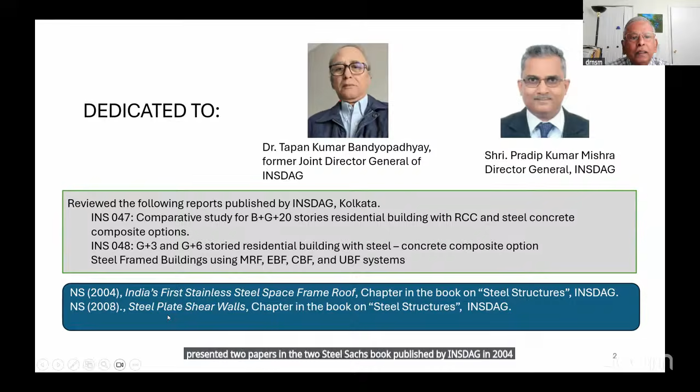Out of so much development, I have selected some 14 topics. I don't know whether I will be able to complete all these topics within the given time, but anyhow, I will try to present them. And some of the things I will go fast so that I could finish it within 1.5 hours.

So the topics are 3D printing and wire arc additive manufacturing, hollow steel sections and jumbo hollow steel sections, high strength steel, stainless steel members and bolts, automated welding, curved steel, diagrid systems to resist lateral forces, earthquake resistant pre-qualified moment connections, steel plate shear walls, composite steel core walls, painting systems to reduce corrosion, repair of steel sections using WAAM and cold spray, sustainability and reuse of steel sections, and finally AI and related topics.

So all of you know that steel is primarily produced using one of the two methods, that is blast furnace, basic oxygen furnace, and electric arc furnace. In India, 43% is by BF and BOF and 57% by EAF. EAF is different from the BF or BOF route, as it does not produce iron and solely produces steel. Steel production in EAF involves melting recycled steel scrap using high-powered electric arcs and is more sustainable.

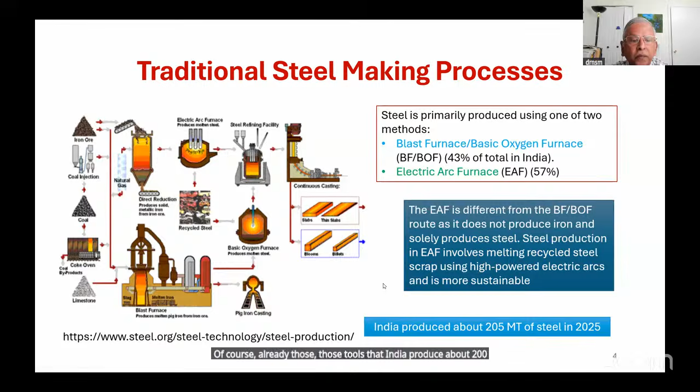Of course, already Ghosh told that India produced about 205 million tons of steel in 2025. So we will first take the 3D printing. When printing structural steel members or connectors, powder-based methods like laser powder bed fusion, used in low volume, high value parts like machine parts, are rarely used due to chamber size constraints and high cost. Instead, the industry uses wire arc additive manufacturing, WAAM, a form of directed energy deposition, laser wire and electron beam DED, and cold spray additive manufacturing. We will talk about cold spray additive manufacturing at the end when we are talking about the repair.

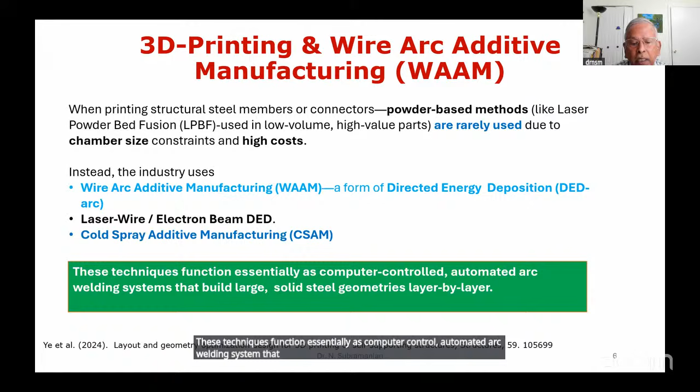These techniques function essentially as computer-controlled automated arc welding systems that build large solid steel geometries layer by layer. These are the equipment necessary for the 3D printing.

We also need a power source or welding generator, a high precision arc welding power source using standard processes like cold metal transfer, etc. A welding torch and wire feeder automatically feeds solid or flux-cored steel wire, typically 0.8 mm to 1.6 mm diameter, directly to the heat source at controlled rates.

Then we also need a shield gas system. It delivers inert or active gas mixtures such as argon around the weld pool to protect the hot structural steel from oxidation or nitriding. And there is a build table.

Additionally, we need CAM and slicing software that calculates the 3D tool path to control heat input and prevent thermal distortion. Finally, thermal monitoring and pyrometers are also necessary. Infrared cameras or pyrometers measure interpass temperature in real time to prevent thermal buildup and grain coarsening in the steel.

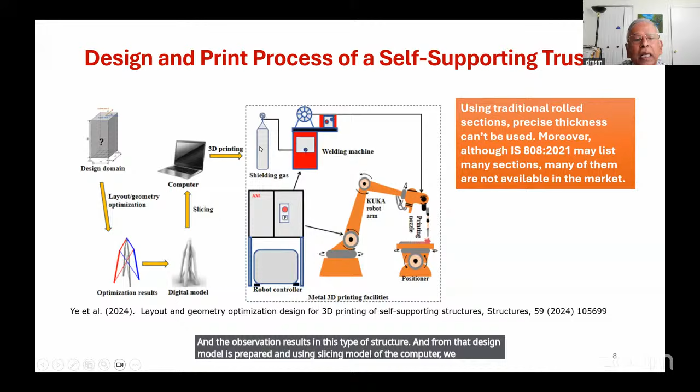So this is an example of the system. You have a design domain where you design, and then it does the layout, geometry, and optimization. The optimization results in this type of structure, and from that a design model is prepared. Using the slicing model on the computer, we use the 3D printing as already explained. These are the different parts of the 3D printing system.

You know that using traditional rolled sections, precise thickness cannot be used. Even when optimization is used, it is not very common in steel sections, because optimizing may give a thickness of 2.3 mm or 4.5 mm, which you cannot use since the rolled sections available in India are listed in IS 808, and many of them may not be available in the market. But when using 3D printing, we can optimize and get such thicknesses, so this will be useful to produce structures with optimized geometry and thickness.

I just wanted to show you the world's first 10.5 meter long 3D printed pedestrian bridge at Amsterdam. This bridge was developed by researchers at Imperial College London in collaboration with Dutch company MX3D and Arup. The construction took 4 years using about 4,500 kg of stainless steel.

Of course, it took 4 years because this was the world's first 3D printed pedestrian bridge. Research is being conducted every day, and the speed will increase.

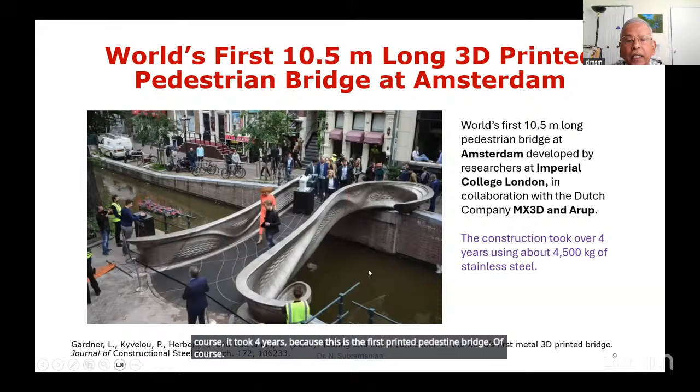I just wanted to show the advantages of 3D printing. The advantages are high deposition rates. WAAM deposits metal at 1 to 10 kg per hour compared to 0.1 kg per hour for laser powder bed systems, making it economically viable for large structural elements.

On material efficiency, ordinary machines waste up to 80% of steel stock, but 3D printing creates near net shape preforms using only the steel necessary for structural integrity.

Topology optimization, as I already explained, uses software to optimize, and also allows elimination of connection plates. Complex multiplanar connections, for example tubular space frame nodes, can be printed as a single monolithic unit, eliminating failure-prone field welds and heavy gusset plates.

Scalability - the build volume is limited only by the reach of the robotic arm or CNC gantry, allowing components spanning several meters. On-demand and remote fabrication - robotic cells can be deployed inside fabrication shops or near construction sites to print custom structural repair parts, which I will explain at the end, or specialized connectors on demand.

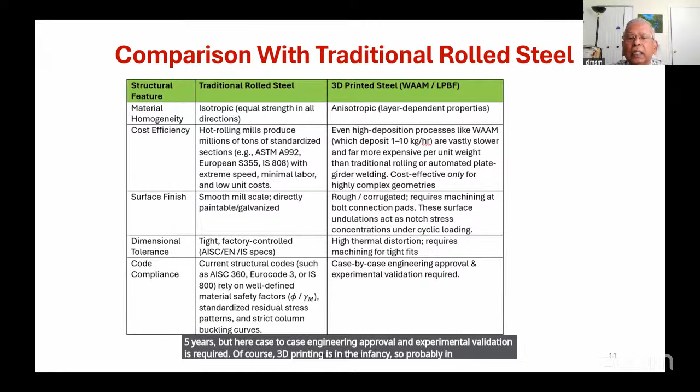For code compliance, using traditional rolled steel means we have traditional structural codes which are revised every 5 years. But here, case-to-case engineering approval and experimental validation is required. Of course, 3D printing is in its infancy, so probably in a few years it will overcome many of these problems.

Next we will go to hollow steel sections and jumbo hollow steel sections. So why hollow steel sections? As per the 16th edition of the AISC Steel Construction Manual, 1,160 different hollow steel sections are available in America. The square HSS range from 12.5 by 12.5 millimeters to 550 by 550 millimeters - that's a very big range. Similar ranges are available in rectangular and also circular HSS.

In the USA, Atlas Tube makes these tubes with a thickness of up to 25 mm. In India, Tata Structura manufacture them as per IS 4923 and IS 1161. They offer simpler and more economical beam and column connections than wide flange sections.

While welding is most common, bolted blind innovative connections including Shuriken by Atlas Tube and Lindapter's Hollo-Bolt and blind bolt have been developed. I will discuss the Shuriken and Hollo-Bolt in the subsequent slides.

They have higher strength to weight ratio in compression compared to wide flange sections. In column applications, they can have long unbraced length, using less steel than wide flange sections to carry the same load, offering cost savings and reduced embodied carbon. These sections put material at the perimeter, hence are very efficient at resisting biaxial bending.

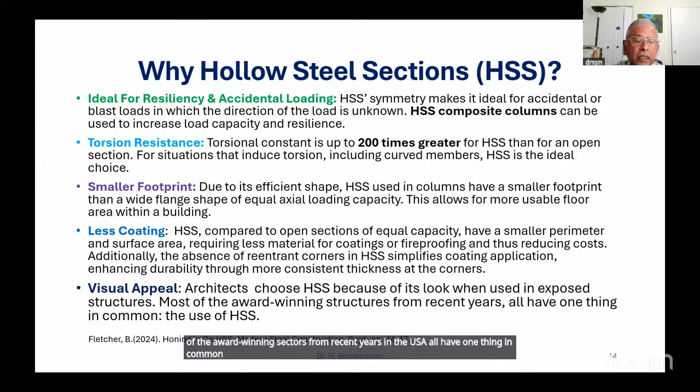They also have visual appeal - architects choose hollow steel sections because of their look when used in exposed structures. Most award-winning structures from recent years in the USA have one thing in common: they use hollow steel sections. Let me show one example of an award-winning hollow steel section building.

So I was telling about the Shuriken connections by Atlas Tube. It was developed by Ted Goldstein, an inventor originally from New York who moved to Japan in 2018. At that time he developed Shuriken.

Unlike traditional connections that require dual side access - when bolting you need access on both sides - Shuriken simplifies installation, making it ideal for tight, restricted or inaccessible areas, while also ensuring faster assembly, lower cost and easier inspection in the field. It is a patented internal connection solution for hollow steel that functions as a one-time use wrench, enabling secure bolting from one side only.

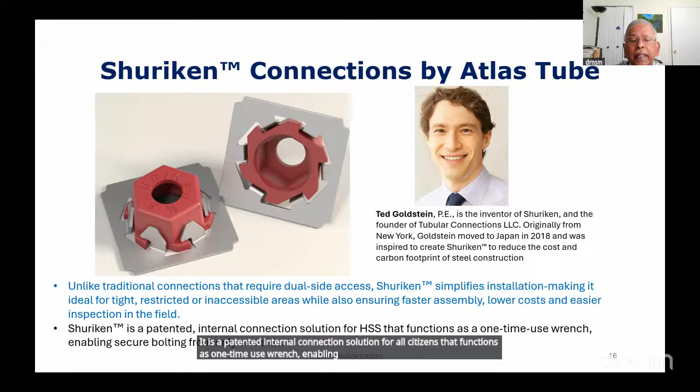So let me show this hollow steel tube with openings. Inside, this device is tack welded to the metal plate in the fabrication shop. On site, the second member is simply bolted to the fixed plate using this connection, with no need for internal access - it's enough to tighten from the outside. This results in faster assembly, fewer alignment issues, and reduced labor and welding costs.

So I have already told you some of the advantages: one-sided bolting, cleaner aesthetics, faster construction, cost-effective use, and easy inspections.

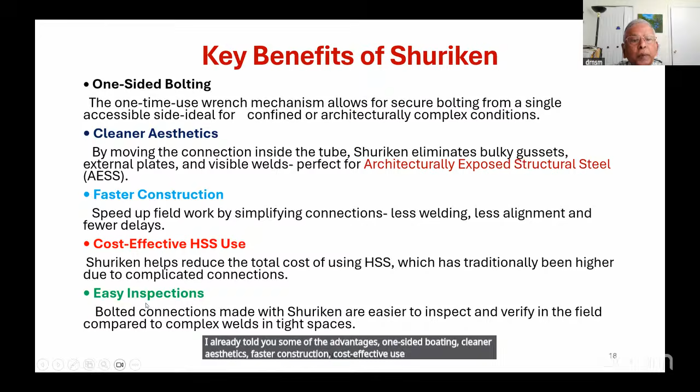Another type of bolting already available in UK and other places—I don't know about India—has a bolt with a sleeve. While tightening, the sleeve expands and it is installed. It is quickly carried out by inserting into pre-drilled holes and tightening with a torque wrench. It's also suitable for blind connections where access is available from one side only, and is recognized in the AISC Steel Construction Manual for use in all seismic design categories.

Let us go to jumbo hollow sections. Jumbo sections exceed standard sizes, allowing for greater structural applications and capabilities. They typically meet ASTM A500 and ASTM A1085 standards, ensuring quality and performance. I have given some sizes.

Square hollow sections greater than 350 mm and up to 550 mm. Rectangular sections from 600 mm by 300 mm up to 850 by 250 mm. Round hollow sections with outer diameter greater than 400 mm up to 700 mm, and wall thickness from 10 mm up to 25 mm. These are commonly used in construction, manufacture, and fabrication of large span structures, bridges, tall buildings, etc., due to their strength and aesthetic appeal. Their design allows for efficient load distribution, making them suitable for large structures. I have shown some of them here.

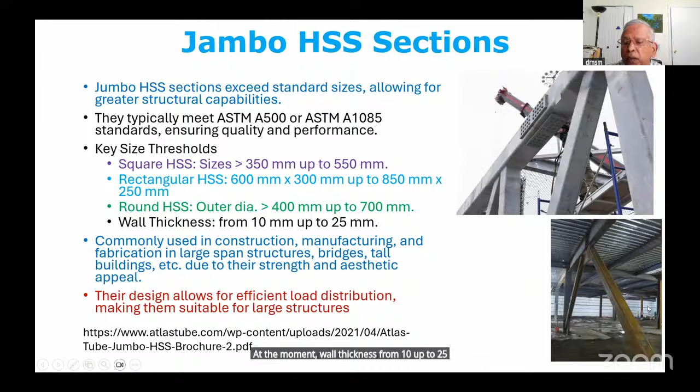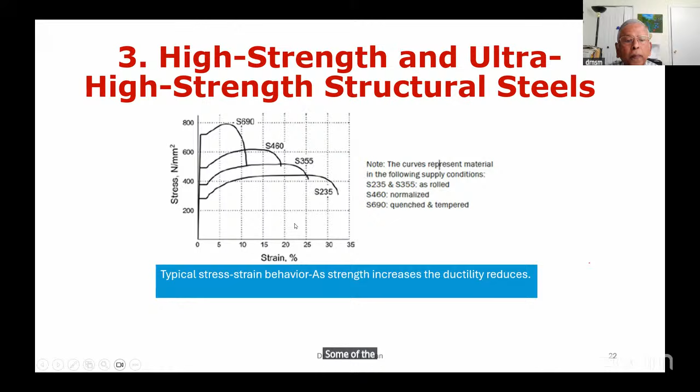Next, we will move on to the third section: high strength and ultra high strength structural steels. Typical stress-strain behavior shows that as strength increases, ductility reduces. High strength structural steel generally has yield strengths of 460 to 700 MPa, and ultra high strength structural steels have yield strengths of 700 MPa and above.

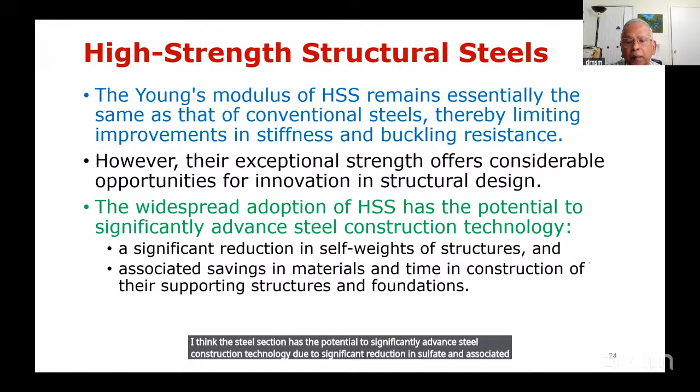High strength steel's Young's modulus is essentially the same as conventional steel, thereby limiting improvements in stiffness and buckling resistance. However, their exceptional strength offers considerable opportunities for innovation in structural design. The widespread adoption of high strength steel has the potential to significantly advance steel construction technology due to significant reduction in self-weight and associated savings in materials and time in construction of support structures and foundations.

IS 2062 is now published in Part 1 and Part 2. Part 1 was published in 2025 and Part 2 in 2026. It gives—I have only listed the high strength steels here—in addition to the low ordinary strength steels, it now also lists up to 650 MPa grades. I have shown the yield stress, ultimate tensile strength, and percentage elongation. As you see, the percentage elongation reduces as the strength increases.

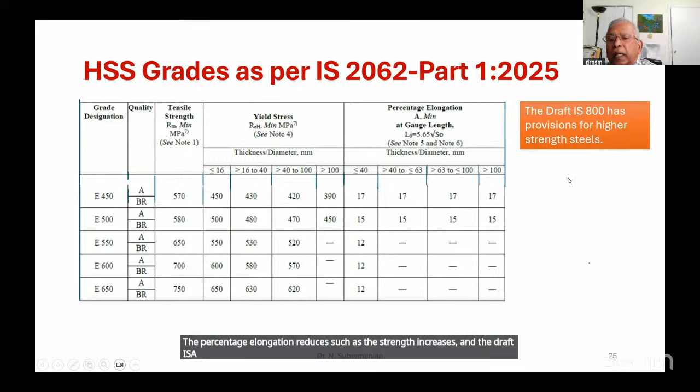The draft IS 800, which I don't know will be released soon—it is under printing, I think—has provisions for high strength steels also.

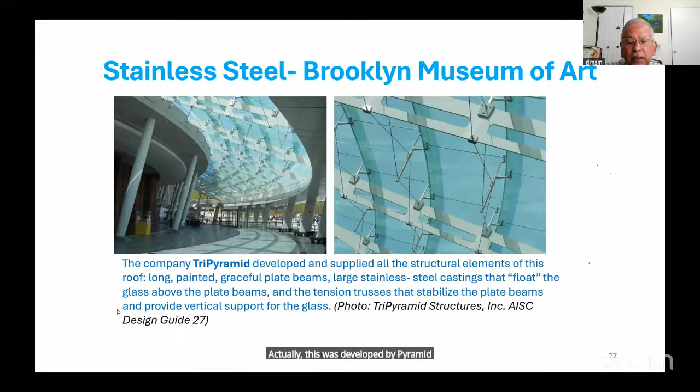Actually, this was developed by TriPyramid Structures, and that is given in design guide 27.

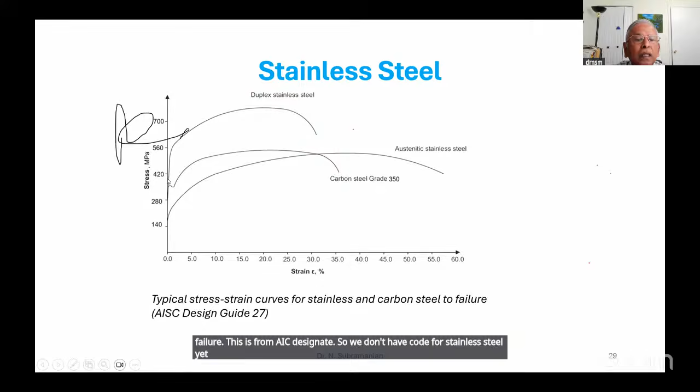This is the typical stress-strain curve for stainless steel and carbon steel for failure, from the AISC design guide. So we don't have a code for stainless steel yet. I don't know how this came.

These are commonly used standard austenitic stainless steels: S304 and S304L, containing 18 to 20% chromium and 8 to 11% nickel. Also S316 and S316L contain about 16 to 18% chromium, 10 to 14% nickel, and 2 to 3% molybdenum, which improves corrosion resistance.

You see that in these there is an L. This L indicates the low carbon version, with a reduced risk of sensitization to intergranular corrosion in the heat-affected zones of welds of these stainless steels.

The duplex alloy S32205 is the most commonly used. It provides a significant increase in corrosion resistance. Other duplex alloys are also present.

I am comparing three different grades of stainless steel, in the groups austenitic, duplex, and ferritic. These are the grades as per Eurocode, and these are the grades as per American codes and ASTM. As shown already, the chromium content differs, and nickel content also differs, and in some of them molybdenum is also present. The ductility in some of them is very high, even compared to steel.

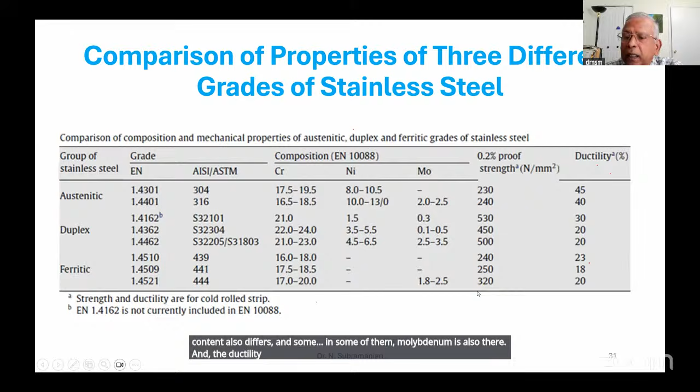And of course, if you are using stainless steel, you also need stainless steel bolts. So I have listed some of the bolts as per ASTM, and I have shown these bolts also here.

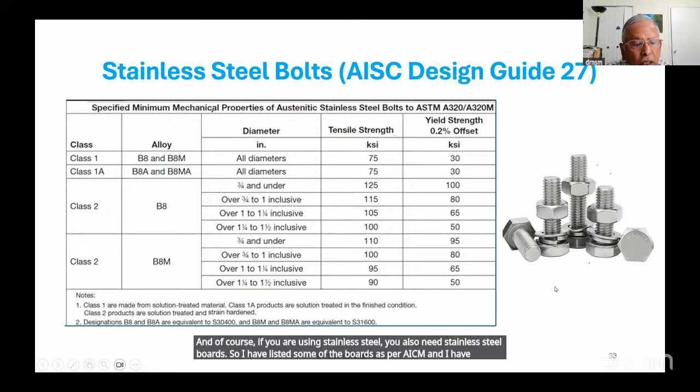So next we will move on to automated welding.

Automated welding is a key technology in modern steel construction, improving productivity, weld quality, safety, and consistency while reducing labor costs and fabrication time. It is widely used in the fabrication of bridges, buildings, and other structures. There are three types of automated welding: mechanized welding, robotic welding, and adaptive welding.

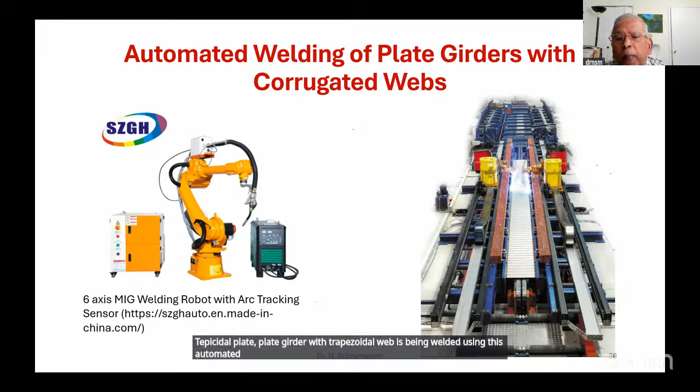I have shown one example of a welding machine. This also has a 6-axis MIG welding robot with arc tracking sensor, and you see that this trapezoidal plate girder with trapezoidal web is being welded using this automated welding system. It is very difficult to manually weld such corrugated or trapezoidal or any other shape of webs using manual welding, so only with automated welding is it possible.

Compared to a flat steel web, the corrugated steel web has higher out-of-plane stiffness and shear buckling resistance. It also has reduced material, 30 to 60% lighter, and reduced labor cost, and higher fatigue strength by 50% because of the stiffened webs. I forgot to mention, if there is a slide and a reference, that will give more details about the things I am discussing here.

Future trends in automated welding are fully autonomous robotic welding cells, AI-driven adaptive welding systems, integration with building information modeling, multi-robot coordinated welding, hybrid laser arc welding systems, automated non-destructive evaluation integrated with welding, and sustainable welding processes with reduced energy consumption and emission.

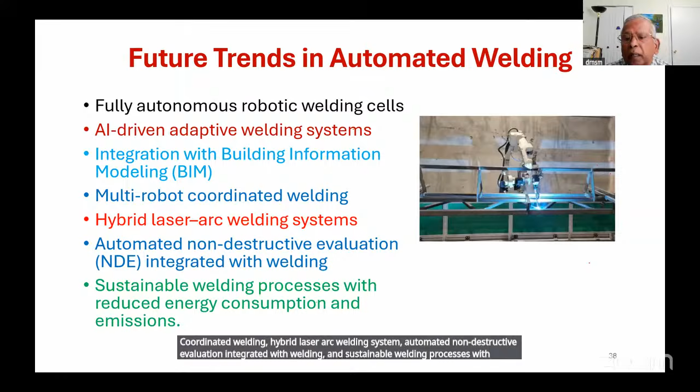Next, we will move on to curved steel.

These are some examples of curved members encountered in practice, like arches, bridges, buildings with curved roofs, and stainless staircases with curved members.

Bender rollers receive the steel from the fabricator, or sometimes furnish it themselves, curve it, and then ship the curved steel back to the fabricator. So a bender roller is typically a specialty subcontractor of the steel fabricator, used for arches, bridges, domes, and curved roofs.

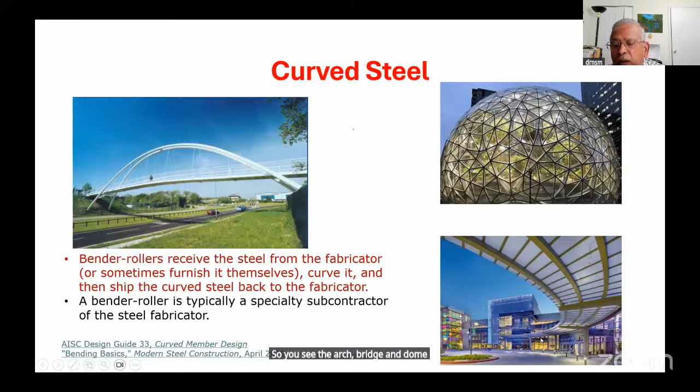This curving of steel members is a specialized fabrication process used to produce arches, curved girders, etc. The choice of method depends on the required radius of curvature, member size, steel grade, cross-sectional shape, and accuracy requirements. We curve these members in 8 different ways, and I will cover some of them in the next slides.

The first method is cold rolling, the most common and economical method. The member passes repeatedly through 3 or 4 powered rollers, and the position of the central roll is gradually adjusted until the desired curvature is attained. The advantages are that no heat is required, it gives good dimensional accuracy, has minimal effect on material properties, and is economical for long members.

Another method is plate rolling. Steel plates are rolled into cylindrical or conical shapes before fabrication. A 3-roll or 4-roll plate bending machine gradually bends the plate into the required radius.

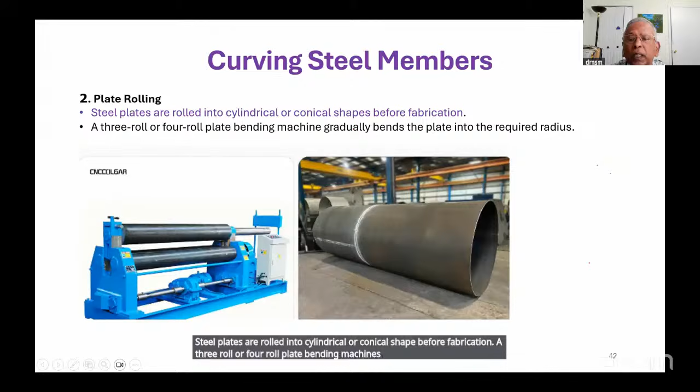The third type is heat bending, used for thick or heavy members that require localized heating. A narrow region is heated to approximately 600 to 900 degrees Centigrade, after which the member is bent using hydraulic jacks or presses. As the heated zone cools, the steel contracts, producing the required curvature. It is suitable for large sections and can produce relatively tight radii.

The problems with heat bending are that it requires skilled operators and may introduce residual stresses. Mechanical properties can be affected if temperature control is poor.

We will also discuss ways of curving hollow steel sections. Circular, square, or rectangular hollow steel sections can generally be curved using rotary draw bending, roll bending, and induction bending. To prevent local buckling or distortion, tubes may be filled with dry sand, low melting point alloy, or internal mandrels.

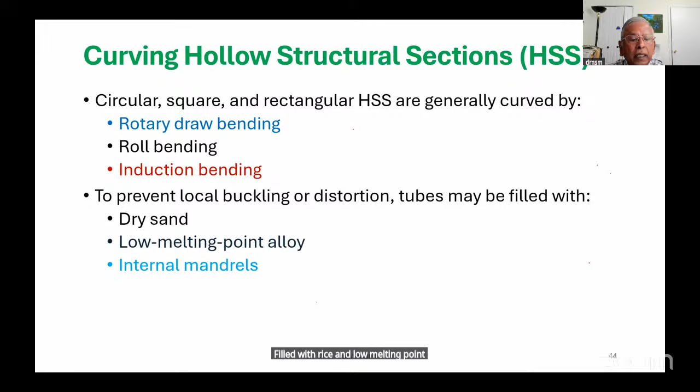The fourth type of bending is press bending. Hydraulic presses apply force at discrete points to bend the member. It is suitable for thick plates, box girders, and heavy structural members.

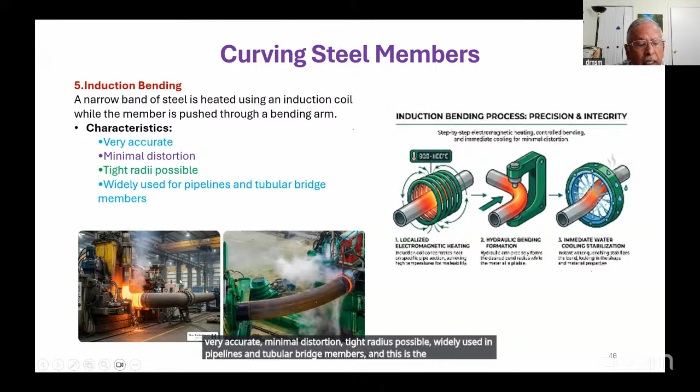Another type is induction bending. A narrow band of steel is heated using an induction coil while the member is pushed through a bending arm. It is very accurate, has minimal distortion, allows tight radii, and is widely used in pipelines and tubular bridge members. This diagram shows the concept and how it is being bent.

Other methods of curving members include stretch forming, used for cold formed members, and flame line heating. Sometimes the member is not actually bent at all; instead, it is fabricated from many straight segments or from curved plates that are welded together.

When bending like this, and especially when using heat, it produces residual stresses and geometric imperfections. This may influence buckling resistance, fatigue performance, fracture behavior, and dimensional accuracy.

For high-strength steel, tighter control is required because these steels generally have lower ductility and are more sensitive to cold working than conventional grades. Design specifications may require minimum bending radii and limits on induced strains.

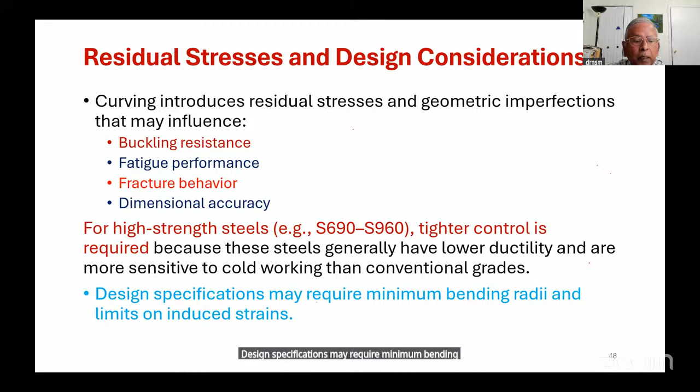I have listed some of the design standards and guidance: AISC Design Guide 33, CIDECT Design Guides—three guides are there—EN 1090-2, Eurocode 3, and American Welding Society D1.1.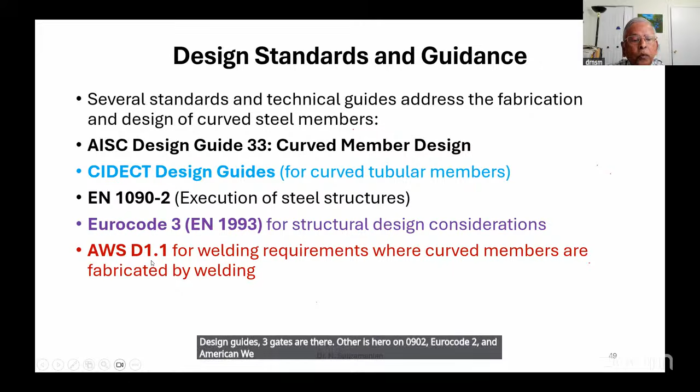We will move on to diagrid systems. All of you know that Fazlur Rahman Khan was the inventor of the tall tubular system. During the 1960s, he found that beyond 10 stories, steel weight was increasing exponentially. Hence he developed the tubular system for high-rise buildings and other variations like tube-in-tube, braced tube, bundled tube, etc. I am going to discuss only the latest development in this tall building system.

This is the diagrid system. In this system, they use perimeter diagonals for structural effectiveness, giving a lattice-like aesthetic. I have shown a diagram and actual structures that use this diagrid system.

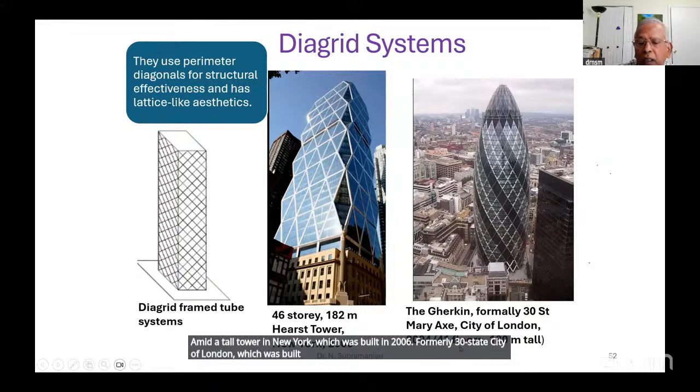One example is a 46-story, 182-meter tall tower in New York, built in 2006. Another is 30 St Mary Axe, formerly known by a different name, in the City of London, built in 2004, which has 41 floors and is 180 meters tall.

As you have seen, almost all the conventional vertical columns are eliminated. The diagonal members carry gravity loads as well as lateral forces due to their triangulated configuration. Compared with conventional framed tubular structures without diagonals, they are much more effective in minimizing shear deformation. It is because they carry shear by axial action of the diagonal members, while conventional tubular structures carry shear by the bending of the vertical columns and horizontal spandrels. You know that tension and compression members are better than bending members.

And I have shown the tubular node for the Gherkin London structure, and you can refer to these references for more details. They provide both bending and shear rigidity. Unlike outrigger structures, they do not need high shear rigidity cores because the shear can be carried by the diagrids located on the perimeter. Super tall buildings with a diagrid system can be further strengthened and stiffened by engaging the core, generating a system similar to tube in tube. The optimum angle for the diagonals was found to be 63 degrees up to 40 to 50 stories and 69 degrees for 60 to 100 stories.

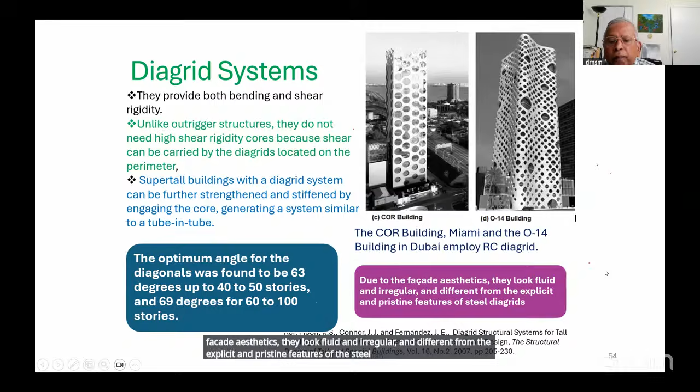I have shown some more examples. The outside facades are different in these, but these are also diagrid systems. Due to the facade aesthetics, they look fluid and irregular and different from the explicit and pristine features of the steel diagrids. Another exotic application of this diagrid structure is the CCTV tower in China, which was constructed in 2008 during the Olympic Games. It is an example of an innovative diagrid system that improves structural performance and produces exotic form. But I don't like this structure because of the two cantilevers which are connecting these two towers.

Another exotic diagrid structure, I found it to be very different. This was designed by the late architect Zaha Hadid, and she is very popular for producing very different looking structures, especially curved structures. This is 160 meters tall with 40 stories. This is the Morpheus Hotel at the City of Dreams in Macau, China. So you see in this image, this is the dynamic portion of the diagrid. So this portion is expanded here and shown.

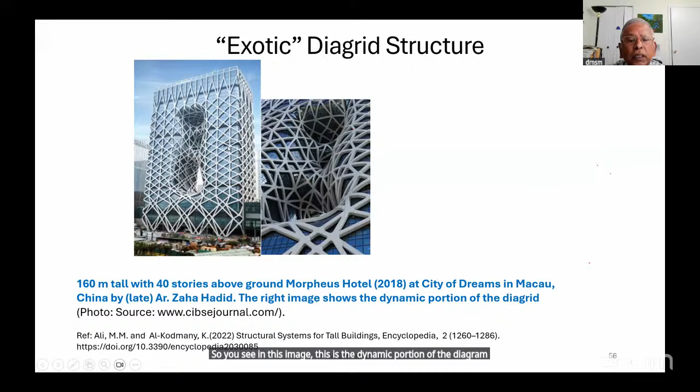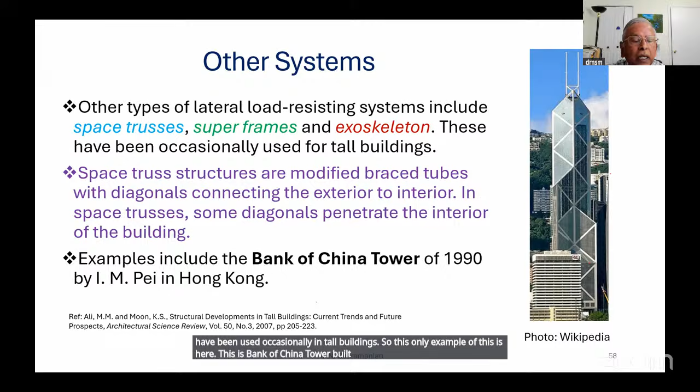And in addition to the ordinary diagrid, we also have the hexagrid system. It's a new system that consists of multiple hexagonal grids. You see, they are hexagonal at the exterior perimeter surfaces of the building. There are also other systems which can be used for lateral load resistance. They include space trusses, super frames, and exoskeleton. They have been used occasionally in tall buildings. So one example of this is here. This is the Bank of China tower built in 1990, and the architect is I. M. Pei. This building is in Hong Kong.

So let us go to the eighth topic. Pre-qualified moment connections. Actually, pre-qualified moment connections were developed to provide reliable, ductile, and economically practical beam-to-column connections for steel moment-resisting frames, particularly in regions of high seismicity. Actually, why were they developed? In America and Japan, they found that their welded steel moment connections were very good. But during the 1994 Northridge earthquake in California and the 1995 Kobe earthquake in Japan, there were unexpected vulnerabilities in the welded steel moment connections.

So AISC 341 established a series of requirements to permit their use. That is pre-qualified use, starting with AISC 358-2010. Now the current one is 2022. Materials, design, detailing, fabrication, and inspection of seven connections for special and intermediate steel moment frames were referenced by AISC 341. These pre-qualified moment connections have been thoroughly tested and evaluated by an AISC sponsored standard body for their expected performance during big earthquakes. Of course, you have to note that in any earthquake resistant connection, adequate performance may include some amount of damage.

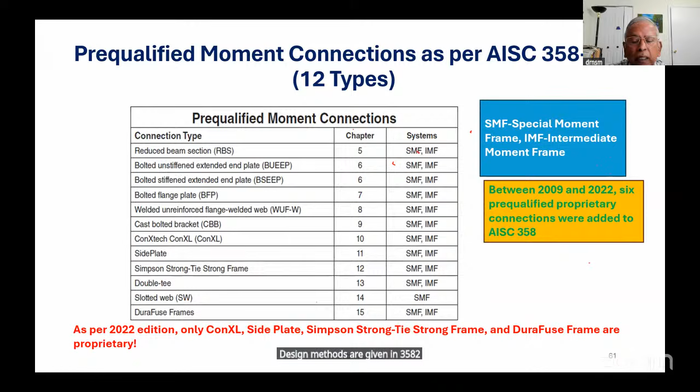ConXtech ConXL, SidePlate, Simpson Strong Frame, double T, slotted web, DuraFuse frames. Actually, some of them are patented. As per the 2022 edition, only ConXL, SidePlate, Simpson Strong Frame and DuraFuse frames are proprietary, and all others you can use. And the design methods are given in AISC 358-22. I will explain only a few of them in the next slides.

This is the simplest thing. The main aim in all the systems is that the connection should be safe during earthquakes, and hence the plastic hinge should form in the beams. So that is the main aim for all these sections. So in this system, portions of the beam flanges are trimmed, you see here, in a curvilinear fashion in the region adjacent to the beam-column connection.

Yielding and hinge formation are to occur within the reduced section of the beam, and the beam web is connected to the column flange using a CJP groove weld extending beyond the weld access holes. Of course, for the limitations of all these connections, see the AISC code 358.

So again, the same thing. Of course, I have shown only curved, but it is also possible to have straight, tapered, or even holes, because the main aim is to weaken the section where the plastic hinges will form. Of course, I have given the radius also, how to trim this section.

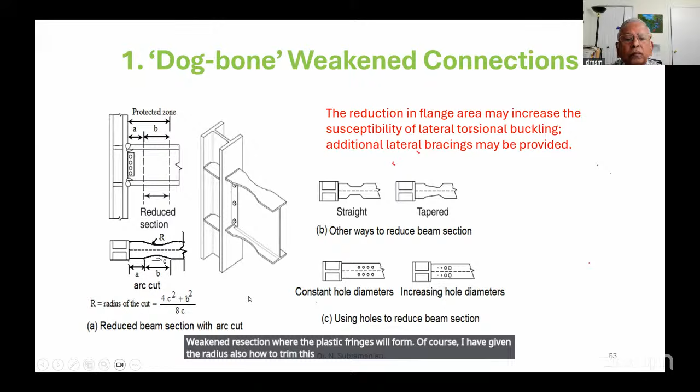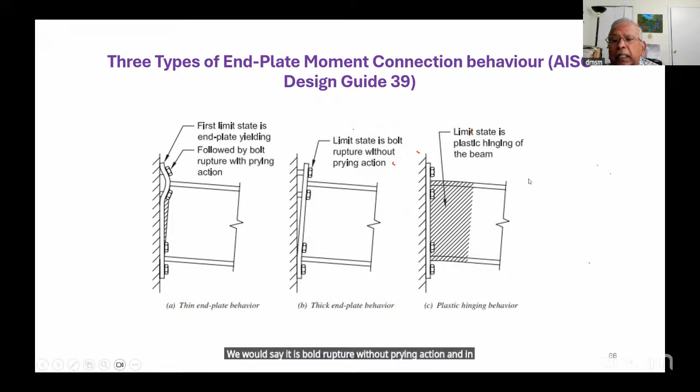And 3 types of end plate moment connection behavior. This is a thin end plate, which will result in prying action. The first limit state is end plate yielding, followed by bolt rupture with prying action. In thick end plates, the limit state is bolt rupture without prying action. And in plastic hinging behavior, the limit state is plastic hinging of the beam.

So this is once again an interesting system: the cast bolted bracket connection. This was previously a patented connection. You see here two different series, W series and B series. One is welded and the other is bolted. The cast high-strength steel bracket is fastened to each beam flange in the shop and bolted to the column flange in the field. The bracket is proportioned to develop the probable maximum moment of the connected beam.

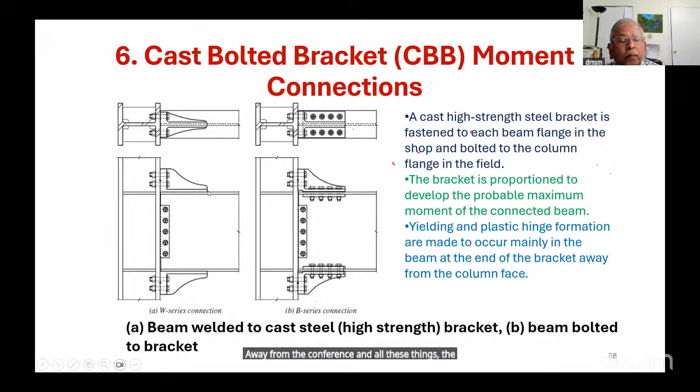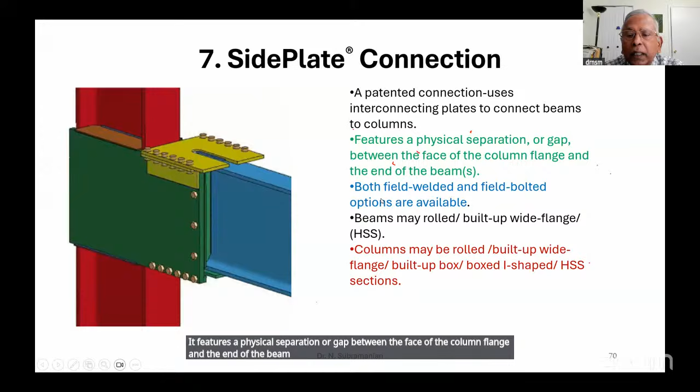This is a patented connection. It looks complicated, but once you give the forces and other details, they will give the plates and other things, and they will fabricate it. It uses an interconnected plate to connect beams to the column. It features a physical separation or gap between the face of the column flange and the end of the beams. Both field welded and field bolted options are available. Beams may be rolled, built-up wide flange, or hollow steel.

Please mute yourself. Others, please mute yourself.

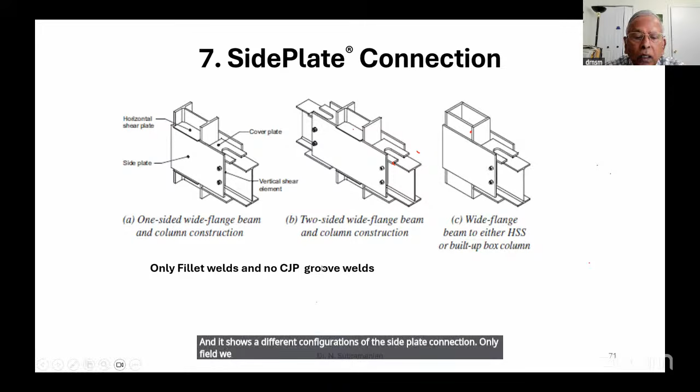And another patented connection is from ConXtech company: the ConXL and ConXR moment connections. This also looks slightly complicated. This patented system permits full-strength, fully restrained connection of wide flange beams to concrete-filled 400 mm square hollow sections or built-up box columns using a high-strength field-bolted collar assembly. These beams are shop welded to forged flanges.

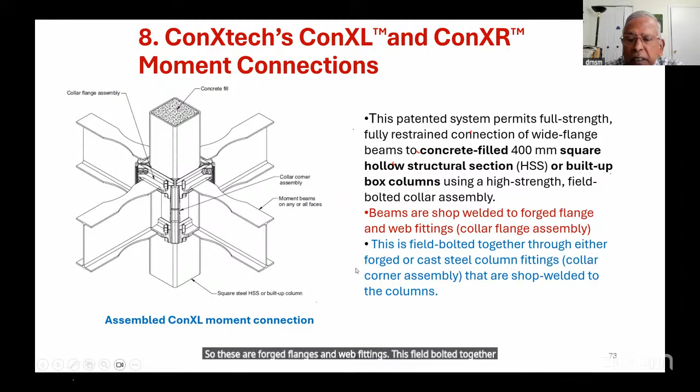So these are forged flanges and web fittings, field bolted together to either forged or cast steel column fittings that are shop welded to the columns. You will see it here, and these are the two different systems, ConXR 200 and ConXL 400. So you see this special connection detail, and this beam is forced into this thing. When it clicks, the joint is formed.

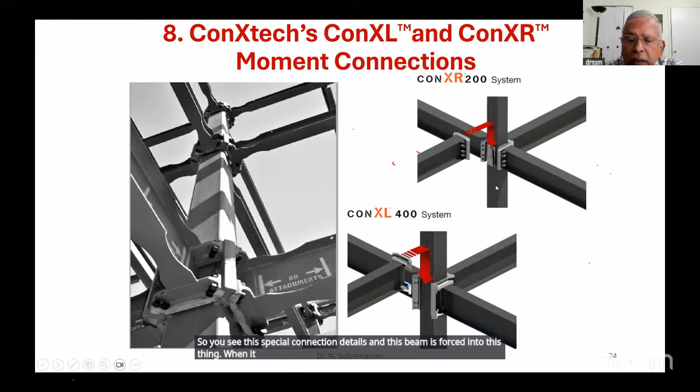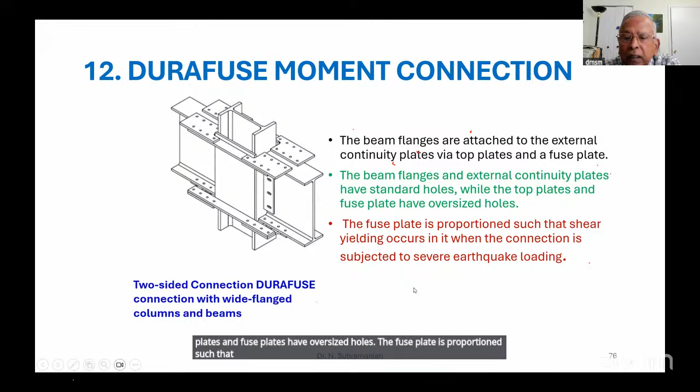So Richards and others developed this system, and based on that, the AISC code has another system. It is the DuraFuse moment connection. This is also a patented connection. The beam flanges are attached to the external continuity plates via top plate and fuse plate. The beam flanges and external continuity plates have standard holes, while the top plates and fuse plate have oversized holes. The fuse plate is proportioned such that shear yielding occurs in it when the connection is subjected to severe earthquake loads.

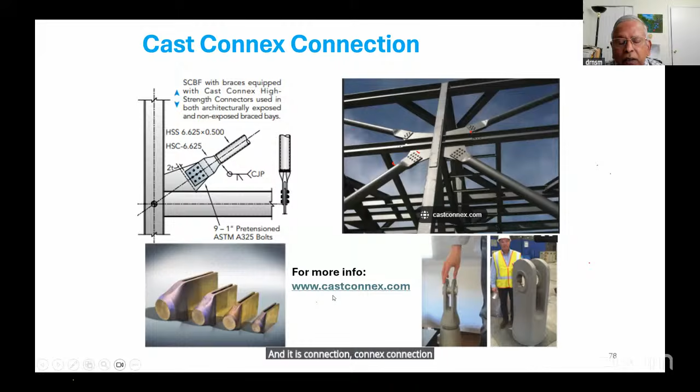So one more thing I told you about is cast connections. I have shown one more example, and it is available in different sizes. And actually, you see the size of the member, which is so big, and it is a cast connection. Cast Connex is the company. More details you can see on the website of Cast Connex.

So these cast connections are high strength steel connectors for round hollow section brace members in a concentrically braced frame. Single cast piece with a solid circular end that is butt welded to round HSS braces. The circular section gradually tapers to two adjacent plates that accommodate a bolted double shear connection, which you saw in the previous slide. Connectors are attached at both ends of the round hollow steel brace and are field bolted or welded

to a gusset plate. It provides a more compact field bolted connection with 50% less bolts, less fabrication and field work. And it eliminates the need for typical welded details such as slotted hollow steel section and net section reinforcement, which are vulnerable during earthquakes. Designed to develop the probable tensile capacity of the bracing member and has been rigorously tested.

And we will go on to the ninth section. I hope I am on time. Hope Mr. Ghosh will give me enough time.

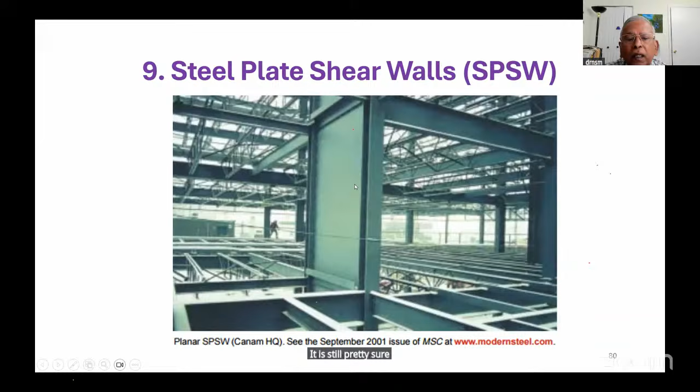Yes, sir. This is the steel plate shear wall. These are similar to concrete shear walls, but they are very economical. SPSW is the abbreviation for steel plate shear walls. This is the Canam headquarters in the USA. You can see more details about it in the September 2001 issue of Modern Steel Construction.

The advantages are less structural wall thickness than concrete shear walls, steel savings of up to 50% compared with moment resistant frames, and compared with RC shear walls it results in reduced foundation cost, reduced construction time, fast to erect and no curing period as in RC walls, and excellent post buckling capacity. The design is included in AISC.

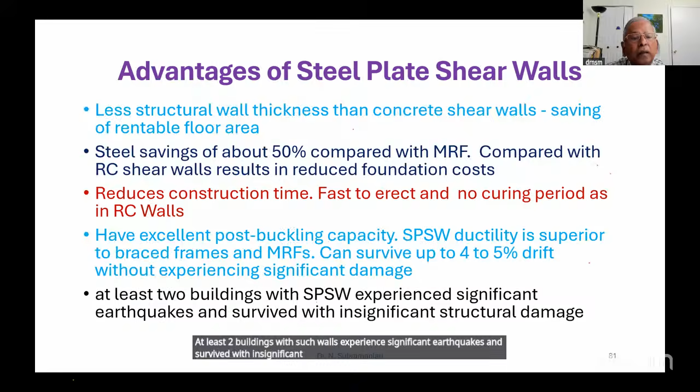SPSW ductility is superior to braced frames and moment resistant frames, and it can survive up to 4 to 5% drift without experiencing significant damage. At least 2 buildings with such walls experienced significant earthquakes and survived with insignificant structural damage. So AISC 341 allows the analysis of each web plate to be modeled as a series of inclined pin-ended strips oriented at an angle of alpha. You can refer to this code for the design equations.

And Professor Bruneau in the USA also worked on perforated steel plate shear walls. These hot rolled steel plates are often thicker or stronger than those required as per design for the webs of SPSW in low and medium rise buildings. This will impose large design demands on surrounding vertical or horizontal boundary elements. These are the vertical and horizontal boundary elements.

Several solutions are available: use of light gauge cold rolled steel, use of low yield steel sheets, and use of perforated steel plate shear walls. The holes also allow for utilities to pass through. The holes may be at the corners or in the center also.

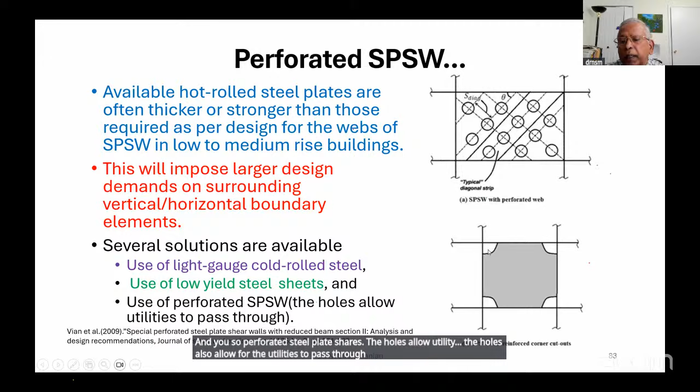Another interesting development is the self-centering SPSW, using pre-stressing cables. This post-tensioning technique enhances the wall's ability to return to its original position after deformation, minimizing residual displacement. It can effectively withstand cyclic loading, demonstrating resilience and stability, and is increasingly used in seismic design due to its ability to absorb and dissipate energy, making it suitable for large earthquake-prone areas.

So we will go to the 10th section, composite SpeedCore walls. This is a very interesting development. This system, also known as the SpeedCore system, is a non-proprietary innovative system, meaning you can use it without paying any royalty. It is a revolutionary composite structural steel framing system.

This is an assembly of the SpeedCore two-story units. Once they are made, the concrete is poured and consolidated between them. The concrete combined with the steel plates provides the ultimate strength and stiffness for the core wall assembly as a composite section. Once the concrete placed inside the plates is cured properly, it acts compositely with the SpeedCore components: plates, cross ties, and shear connectors.

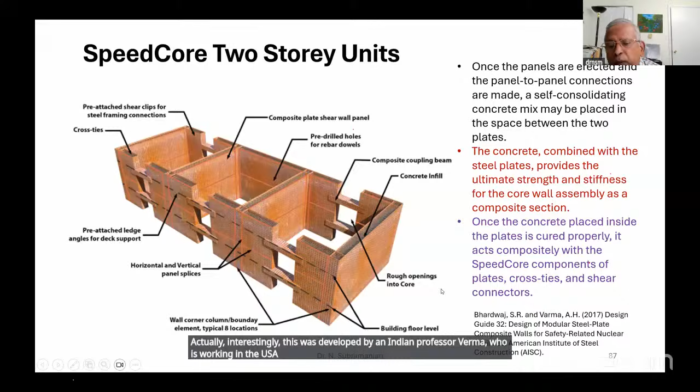Interestingly, this was developed by an Indian professor, Varma, who works in the USA, with Bhardwaj as a student. The first application of this system was in Rainier Square Tower in Seattle, a 58-story, 260-meter tall mixed-use tower that opened in 2021. Actually this is only a schematic; I will show the actual structure in the next slide.

The use of SpeedCore cut 10 months off a 32-month schedule, erecting 43% faster with 4 floors completed weekly. It consisted of 8 concrete-filled steel box columns at the core corners, each one the thickness of the core wall. These blocks, ranging from 530 mm to 1140 mm in thickness, were formed with two 4.27 m high steel plates—I think it is not thickness, it is height—varying in thickness from 12.5 mm to 19 mm, tied together with 25 mm diameter steel rods placed at 300 mm centers both horizontally and vertically, and craned into place between each set of columns.

This shows the erection of this building, and extensive testing was carried out at Purdue University by Professor Varma. It demonstrated that it performed safely at a 2-hour fire rating on a 300 mm thick wall without any added fireproofing, a strategy that MKA, a construction company, is now implementing in their new projects.

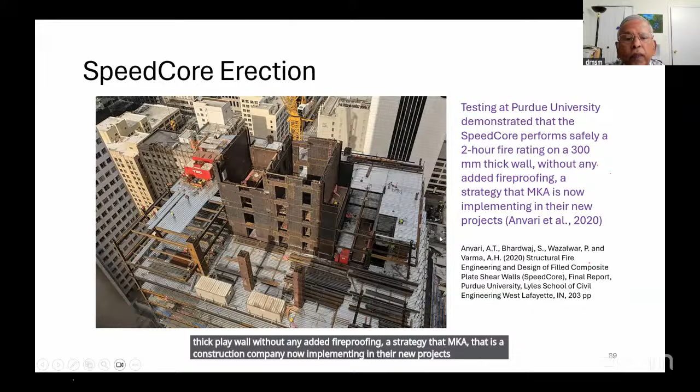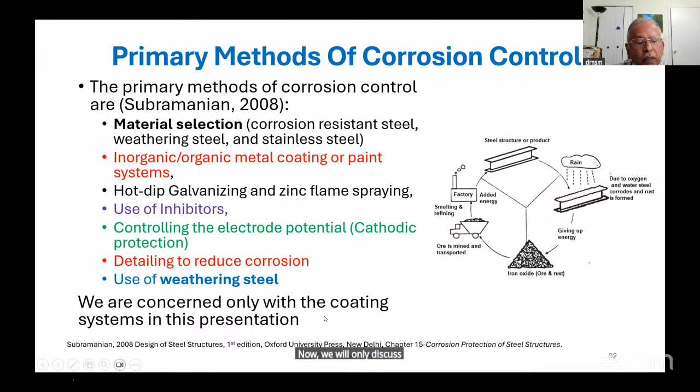Now we'll go to the 11th topic, painting systems to reduce corrosion. The primary methods of corrosion control are material selection, inorganic or organic metal coating, hot dip galvanizing, use of inhibitors, controlling the electrode potential, detailing to reduce corrosion, and use of weathering steel. Now we will only discuss one of the coating systems in this presentation.

Chapter 15 of IS 800 provides details like desired life of coating system in different environments and specification for different coating systems. It also gives details on 3-coat heavy duty anti-corrosion systems where the top coat acts as the first line of defense, such as conventional top coats like acrylic urethane.

This has limited UV resistance and degrades under UV exposure from sunlight, gradually thinning, micro-cracking, and losing binder integrity. Once the top coat erodes, moisture, oxygen, and chlorides rapidly break down the underlying epoxy barrier, initiating localized attack. Hence, a new approach was needed.

An overcoating, the third layer of coating, called FEVE top coat, has been developed in Japan, and it is discussed now. FEVE is a short form of fluoroethylene vinyl ether.

It represents one of the most significant advances in high performance corrosion protection for structural steels, where traditional polyurethane top coats degrade after 10 to 15 years. FEVE coatings extend maintenance-free service up to 30 to 60 years.

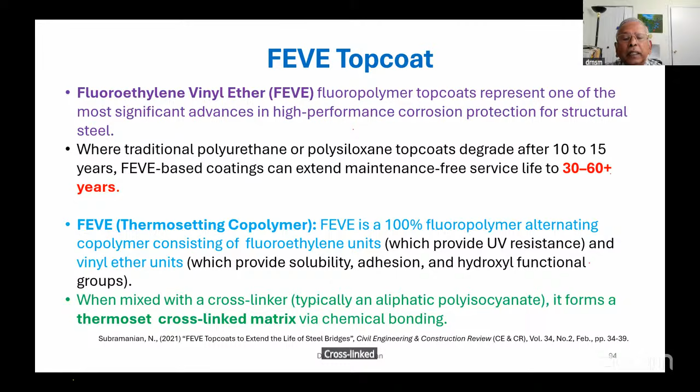It's a 100% fluoropolymer alternating copolymer consisting of fluoroethylene units and vinyl ether units, which provides solubility, adhesion, and hydroxyl functional groups. When mixed with a cross linker, typically aliphatic polyisocyanates, it forms a thermoset cross-linked matrix via chemical bonding. It's a chemical process.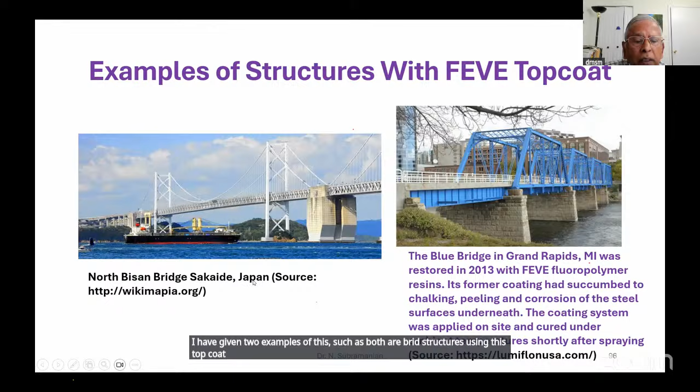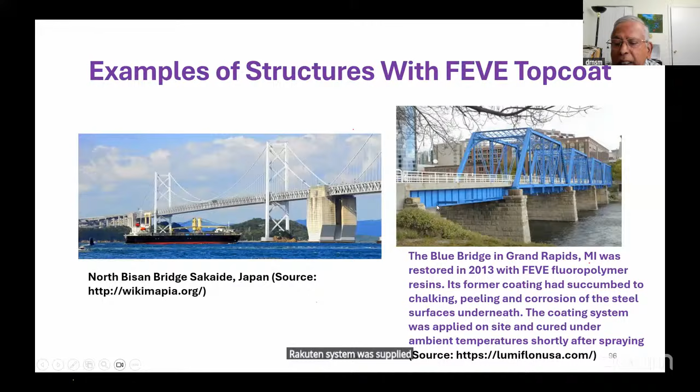I have given 2 examples of these structures, both bridge structures using this top coat. One is a bridge in Japan and the other is in the USA. This was restored in 2013 with FEVE resins. Its former coating had succumbed to chalking, peeling, and corrosion of the steel surface underneath. The coating system was applied at site because it's an existing structure, and cured under ambient temperature shortly after spraying.

Now we will go to strengthening and repair of structures. There is a need to enhance strength and service life of structures, mainly due to degradation of steel with time, due to corrosion and other factors, or to increase its service loads.

Traditional techniques such as steel plate reinforcement by welding or bolting can be time consuming and complex. Smart materials such as shape memory alloys have also been recently explored, along with the use of external prestressing cables, which I discussed in a previous slide.

The recent emergence of WAAM in construction offers great potential for strengthening and repair. Significant capacity gains can be attained through the addition of relatively little WAAM material, but in optimum locations such as highly stressed regions of new structures or damaged critical regions of existing structures. Let us see how.

Gardner et al., in their paper, describe this strengthening approach. You can strengthen the whole member by adding extra material everywhere, or only where it is corroded, and also the extra material can keep increasing at the midsection but reduce at the ends. All these options are possible.

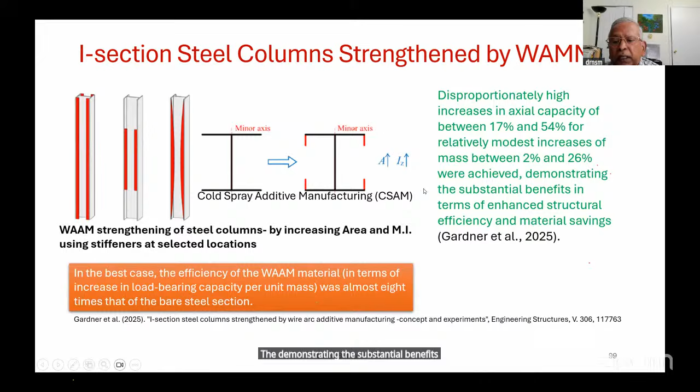Of course, WAAM I discussed initially. I will now just discuss cold spray additive manufacturing. It is a solid state material deposition process originally introduced in the 1980s for surface coatings.

By using heated compressed gas to accelerate metallic or composite powders to supersonic speeds, it creates impact-induced dense bonds via mechanical interlocking and metallurgical adhesion. Because the feedstock remains solid throughout the process and relies on kinetic energy rather than melting, cold spray eliminates thermal defects typical of high temperature processes such as oxidation, phase transformation, and severe residual thermal stresses.

Successful cold spray buildup requires feedstock particles to exceed critical impact velocity across two distinct stages. In the first stage, incoming particles bond directly to the substrate. In the second, subsequent particles bond to previously deposited layers. Where the powder and substrate share the same composition, the critical velocities for both stages are essentially identical.

I will show a slide which shows the cold spray additive manufacturing process, how it bonds, its advantages, and typical applications.

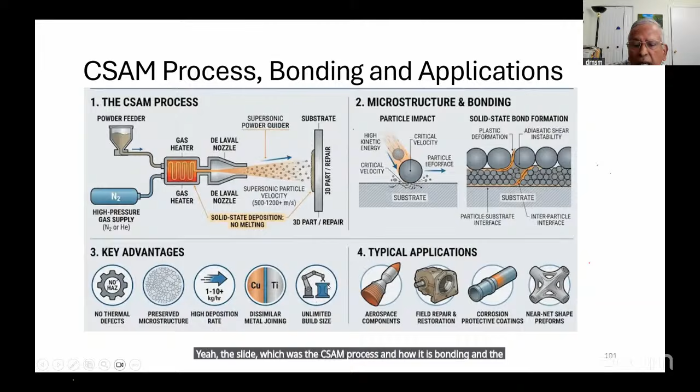So we will pass on to the 13th topic, sustainability and reuse. Three great things we have to remember in sustainability is reduce, recycle, and reuse. Reduce is by using high-strength steel, hollow steel sections, optimal configurations, etc. Recycle, of course, steel is the most recyclable material - 80 to 85% of steel is recycled, especially in electric arc furnace. And we will only discuss reuse here.

Of course, in order to reuse, you have to properly design the structure so that the beams or columns can be dismantled and used in a new structure.

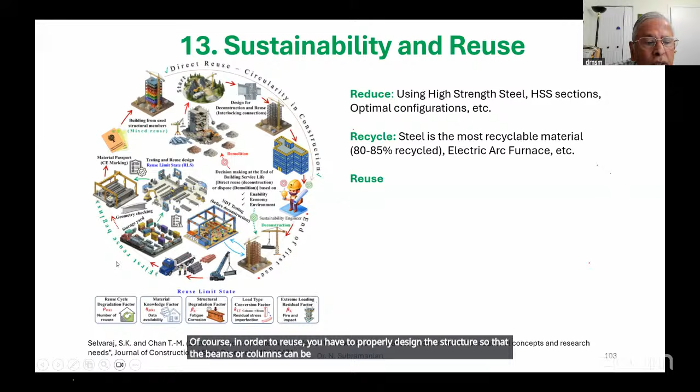As already I have told, it involves designing, constructing, operating, and decommissioning structures in a manner that minimizes environmental impact while maximizing economic and social benefit throughout their life cycle.

Steel is one of the most sustainable construction materials because it can be recycled indefinitely without significant loss of mechanical properties. Modern steel production increasingly uses electric arc furnace, renewable energy, and scrap steel, substantially reducing carbon emissions compared with traditional blast furnace production.

The use of high-strength steel, weathering steel, modular construction, building information modeling, life cycle assessment, and environmental product declarations further enhances the sustainability of steel structures.

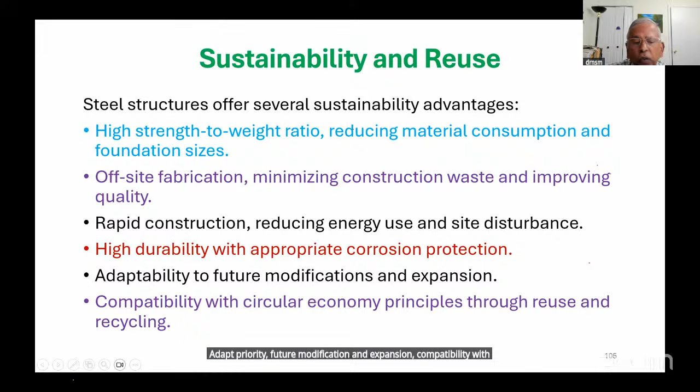They offer high strength to weight ratio, reducing material consumption and foundation sizes; offsite fabrication, minimizing construction waste and improving quality; rapid construction, reducing energy use and site disturbance; high durability with appropriate corrosion protection; adaptability to future modification and expansion; and compatibility with circular economy principles through reuse and recycling.

So it is uniquely suited for direct reuse, not like concrete where the steel rods have to be separated and processed in a factory, etc. The steel members can be easily dismantled and incorporated in a new structure with minimal reprocessing, provided it has been designed for reuse.

Unlike recycling, reuse preserves the embodied energy and carbon already invested in manufacturing, resulting in much greater environmental benefits. Successful reuse requires careful deconstruction rather than demolition, inspection for corrosion, fatigue, deformation, and damage, verification of material properties and weldability, assessment of residual strength and serviceability, and appropriate redesign and connection modification to satisfy current design codes.

Of course, beams, columns, trusses - all these things can be reused in new structural steel structures. I have listed some of the benefits and challenges; the benefits are significant so I am not going to read these in detail.

Challenges are limited documentation of existing structures, variability in material properties of old steel, inspection and certification requirements, and transportation, storage, and logistics - because if you are using it in one place and reusing it in another place, it requires some storage logistics. There is also a lack of standardized design guidance and market infrastructure.

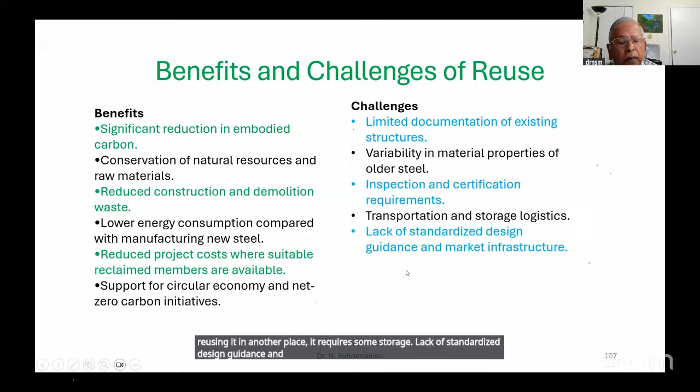Finally, we have come to the final topic. I will go fast here also. This is artificial intelligence and related topics. Because artificial intelligence is a buzzword which is used everywhere, I just wanted to add this also.

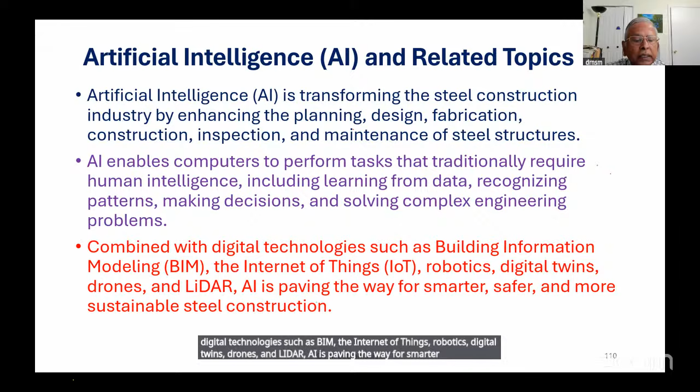Artificial intelligence is transforming the steel construction industry by enhancing the planning, design, fabrication, construction, inspection, and maintenance of steel structures. It enables computers to perform tasks that traditionally require human intelligence, including learning from data, recognizing patterns, making decisions, and solving complex engineering problems. Combined with digital technologies such as BIM, Internet of Things, robotics, digital twins, drones, and LiDAR, AI is paving the way for smarter, safer, and more sustainable steel construction.

So AI could be applied throughout the life cycle of steel structures. Structural design optimization, you already know about this. Building information modeling, of course these are slightly expensive systems - this is the integration of AI with BIM. And connection design, fabrication automation.

We also saw welding, but you can also have robotic cutting, drilling, welding, and assembly using AI for improved precision and productivity. Quality control, construction planning, structural health monitoring, and digital twins. In digital twins, virtual replicas of steel structures are continuously updated with sensor data to enable real-time performance assessment and life cycle management.

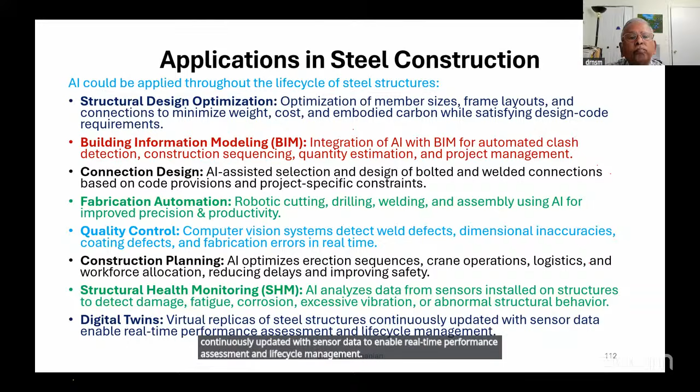Future trends in AI: the future will increasingly rely on intelligent digital ecosystems combining AI, BIM, digital twins, robotics, Internet of Things, cloud computing, and advanced sensing technologies. These innovations will support autonomous construction, real-time structural monitoring, optimized maintenance, and sustainable infrastructure management. AI will increasingly function as an engineering assistant, enabling structural engineers to make faster, better informed decisions while maintaining safety, code compliance, and engineering judgment. While AI cannot replace the experience and judgment of structural engineers, it serves as a powerful decision support tool that enhances efficiency, innovation, quality, and sustainability across the entire life cycle of steel structures.

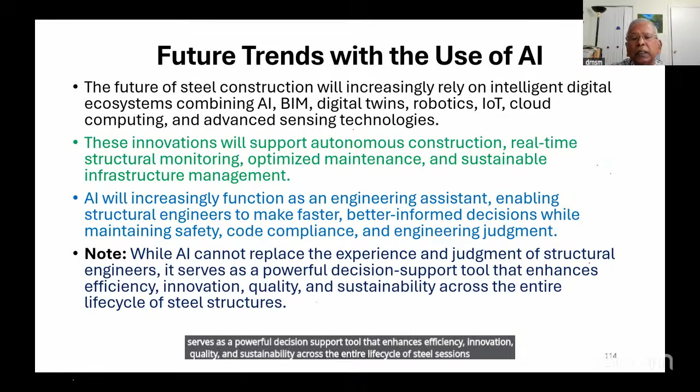Finally, I just wanted to show one interesting structure - the world's largest hybrid tensegrity bridge at Queensland, Australia. You see the advantage this has: continuous tension members and discontinuous compression members. You all know that tension is a better system than compression, because in compression we have buckling. This complex cabling system comprises 80 main galvanized helical strand cables and 252 tensegrity cables made from super duplex stainless steel.